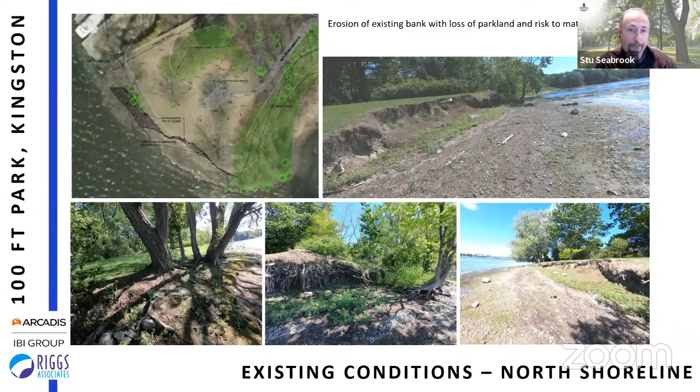So this slide shows photos of the southern portion. Oh, there we go. It shows photos of the southern portion of the shoreline south of the storm drain outfall. This shoreline would also be described as a low bluff, but it has been formally protected against erosion by a stacked rock wall. The nearshore area, again, is gently sloping with shallow depths. The nearshore material is similar to what we've observed in the last slide, sediment and cobbles. The cobbles here are maybe a little bit larger, likely due to movement of sediment due to the southwest wave attack predominantly.

The stacked block shoreline has been relatively successful in protecting the shoreline, and in general is in relatively good condition. There has been a loss of some soil from areas immediately behind the rock wall. This is expected to be due to wave overtopping and hydraulic action of waves around the upper rocks. Recent years of high water are expected to have been responsible for acceleration of the problem in this area as well. There are a few instances of the stacked rock wall leaning a little bit towards the shoreline as some of the backfill has been eroded.

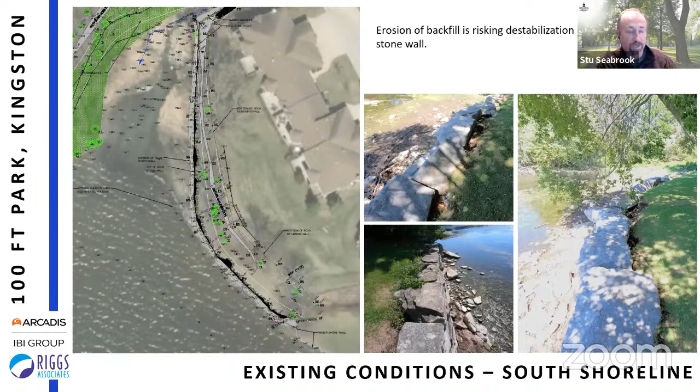This loss of soil will ultimately remove sufficient backfill to destabilize portions of the wall, and currently presents a hazard to the public due to the uneven ground and some occasional relatively deep holes that are immediately behind those armor stones. And this observed erosion again would be expected to continue during high water conditions if it's not addressed. Next slide, please.

I'm going to turn it over to Tim McCormick from IBI to discuss some of the landscape function. Thanks, Stu. I have the pleasure of walking through some of the other elements not related to the shoreline, but opportunities in the park to provide some improvements and correct some challenges that are going on, specifically related to the bridges and stone steps. We've identified the lower bridge as being the bridge closer to the shoreline as you're walking down the path. This bridge at present has worn deck on top of it, so we're starting to see decay and breakdown of some of the deck materials, which creates an unsafe situation and can cause slipping or breaking.

We're looking at what's happening with that one there. There's piers in the channel, which can create a long-term problem. We're starting to see decay and breakdown of some of those piers, which could long-term create a potential for failing of the bridge, which is why we're reviewing this one and opportunities to maybe improve upon it. The railings themselves are not currently to code. When they were installed originally, they would have been. However, as time has gone on, they've now fallen behind on the code, and this is an opportunity to review the actual safety elements of the bridge as well as the railings on the bridge.

We are seeing a failing substructure, and that is even more poignant by the fact there was a recent repair that had to be made last year to correct some challenges with the bridge and some failing elements underneath of the substructure, which impacted some of the decking and connections that went on with it. So this is why this bridge is part of this project, looking at opportunities to improve upon it and create a nicer bridge or better suited bridge for this space, as well as create one that is safe and working for the current standards. Next slide, please.

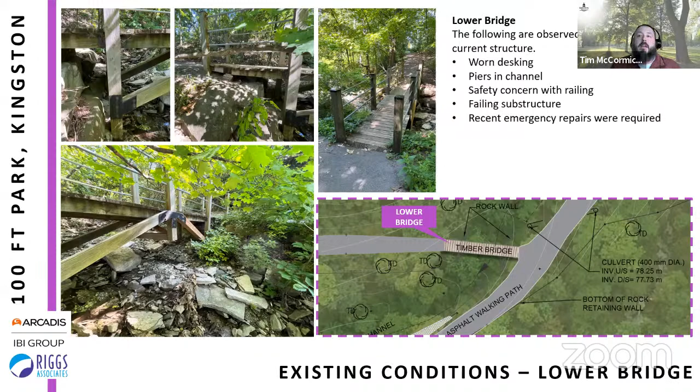The upper bridge connects to the Limeridge Trail or Limeridge Drive stone staircase. So it's right at the stone staircase and provides a connection there. Just like the lower bridge, this bridge is showing worn decking. It has piers in the channel. And this one even more so has more concerns with the railings. As you can see here, they are chain, offer not a whole lot of stability for going over the bridge and potential safety concerns. And then there is a failing substructure with this as well. And that's just due to the age and nature of the wood that was used to construct these bridges originally. Next slide, please.

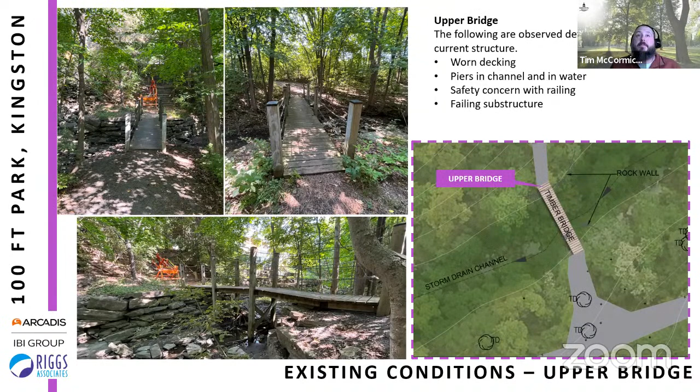The stone steps are currently showing some deficiencies and some erosion. Elements we saw in observing, sort of reasons for why we're considering replacing these, are uneven steps, which is natural. With natural stones, that's pretty common. So these situations are stones where each tread is a different height, so it can make walking up and down them a little more challenging.

There's safety concerns with the railings and failing in some of the railings in some cases. And there's been a lot of recent repairs and need for repairs along this area. So part of our review is looking at opportunities to create a safer condition and creating something that is maybe a little easier to maintain in the long term for the city.

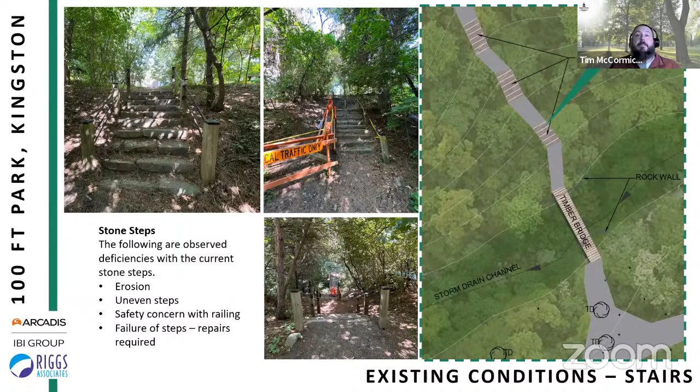Next slide, please. I'll turn the presentation over to Rob. Okay.

We've identified several natural features that will need to be considered during the construction phase. Obviously, fish habitat offshore. The quality of the fish habitat is a bit degraded here due to the periodic drawdowns that are required by the Rideau Canal. And there's a number of invasive species that use this particular area, which also degrade the habitat, but it's still fish habitat.

The offshore areas contain wildlife habitat features as well. Certain special concern species, which qualify under the wildlife habitat heading. It's also an important stopover site for migratory waterfowl. Shoreline features: the woodlands provide a buffering function that obviously will need to be maintained. And there are turtles that nest on the shoreline areas.

The woodland features in the woodland may contain special concern species. We can't confirm that at this point, but there are steps that will need to be taken to mitigate potential impacts in that regard. There's also, this is not directly related to the project, but there are concerns with sedimentation caused by the nature of the watercourse.

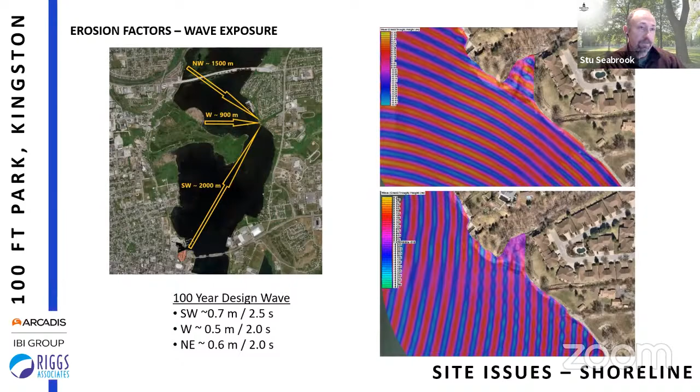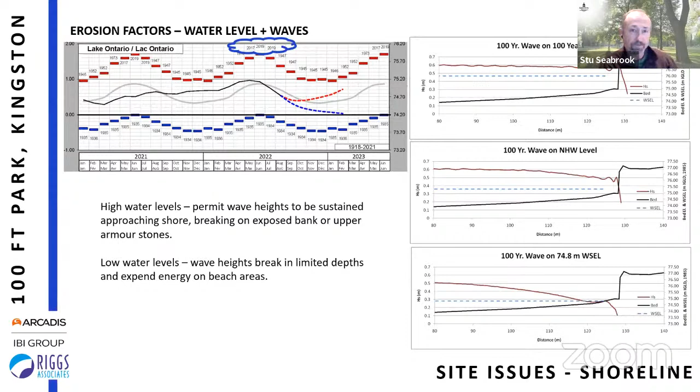In terms of consideration of structures, there's typically a wide range of considerations for shoreline protection, ranging from fully vegetative options to structural walls along the shoreline in cases where we've got significant wave heights, very large wave heights, and lots of hydraulic activity at the shoreline. This site, the north shoreline, sits somewhere at the lower end of this scale. We do have, as I said, relatively small wave heights to deal with and relatively low periods. The wave heights are too significant, in my opinion, to be protected with just a vegetation option. So we're looking at an option that includes some form of beach anchoring and some vegetative options as well.

The southern shoreline is already protected, of course, with that stacked rock wall. We don't propose to make any significant changes in that area. What we would look to do is make some modifications in that area to help protect against overtopping.

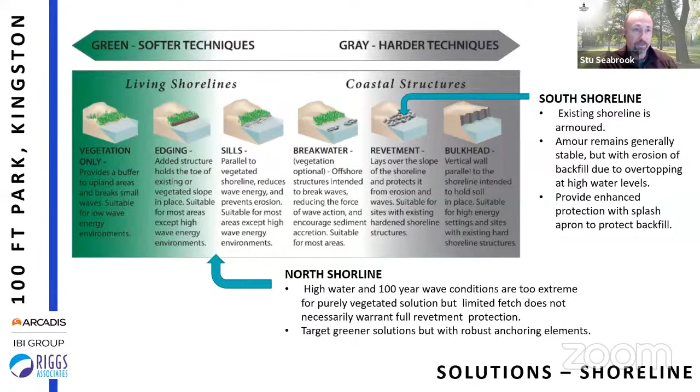This would represent a typical concept consideration that we're looking at further right now for the northern portion of the shoreline. It includes a rock sill to anchor the beach. That rock sill would be integrated into the local beach, so a lot of it would be buried so that we're not looking at a significant pile of rock along the shoreline, but it would be in there in place in order to protect against erosion of the upper slope during periods where we might experience some erosion along that section. The rock sills would be largely buried.

Steep slopes will be flattened and they would be vegetated with species to provide some stabilization of the shoreline through their root structures and to provide some habitat enhancement. We would also look at potential to provide a point of public access within this section of shoreline, as it is an area that is relatively frequently accessed by the public along the park area. Next slide, please.

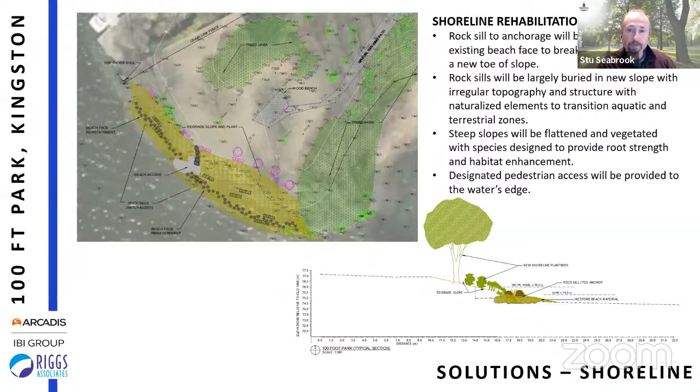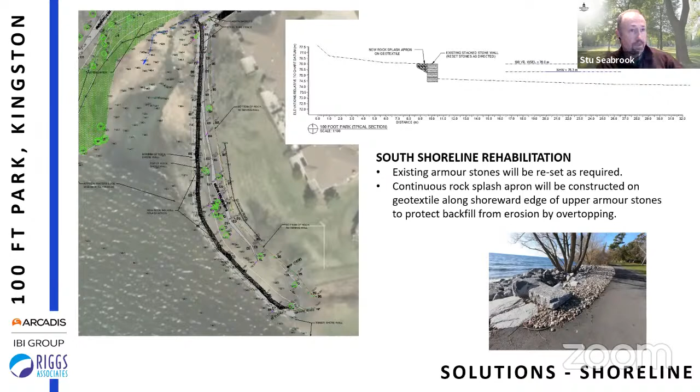This is in Kingston along the Mullet Path. Something like this would provide material that's more resistant to erosion in the event that high water occurs and we do get some overtopping. Next slide, please. I'll turn it back to Tim now for some discussion of some of the landscape solutions.

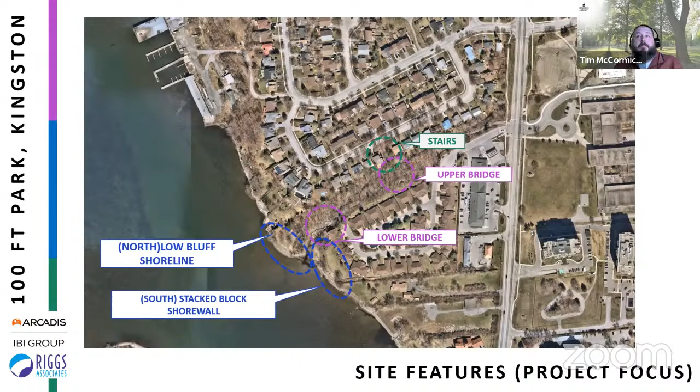Thanks, Stu. For this section here, again, I'm going to focus in on the bridges and put this slide back up as a bit of a reminder, just so we know when we're talking about the lower bridge and upper bridge and the stone stairs, where they're located, and just sort of tie back to where they are in the park. Next slide, please.

So in our preliminary review, we've started to look at opportunities for bridge improvements at both the upper and lower locations. For the lower bridge, the critical part is really improving the decking and railings. That's one of the critical parts here, improving user safety throughout the whole use of the bridge and tie-ins on those edges, as well as on the bridge itself. This may include some abutment improvements, abutments being the elements that anchor the bridge on either end, trying to find opportunities to minimize erosion and really hold the bridge in place if there are flooding situations that may occur in the channel.

For the lower bridge, we're looking at a potential realignment. This is an opportunity to maybe shorten the crossing as well as orient it just a little bit more square on the channel. We recognize why the bridge is put where it was, as it ties in nicely to the trails and works as sort of the most direct route, but we're looking at opportunities to see what is the right answer as we go through it. So an opportunity to maybe have a realignment.

The other part we're looking at is really less footings in the channel. Currently, there are footings or piers that come down and touch into the water. We're looking at how we might be able to span this without having to have those footings in the water area, which will create a longer lasting bridge and minimize maintenance requirements overall. So that's one of the bigger elements we want to try to do through the treatment in this area.

We'll also be looking at opportunities to improve the trail, tying back into the shoreline work on the other side of the bridge, and trying to make sure that we're cleaning up as we go through this area and tidying up any loose ends in the trail or the park where we can.

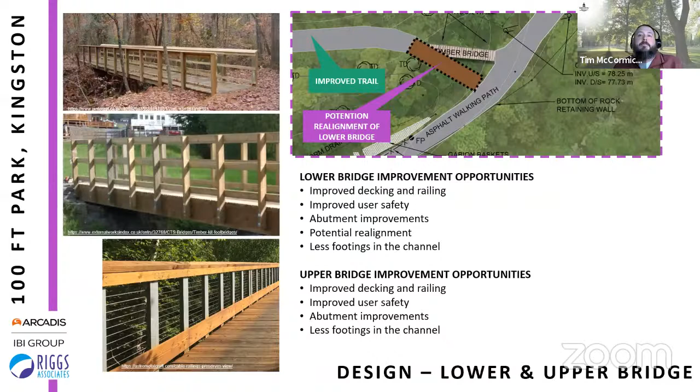So the stairs themselves, we're reviewing the orientation of the stairs. We recognize that the stone stairs have been there for a while, and we want to minimize the impact to the adjacent areas around, so minimizing impacts to any existing trees or the slopes around it. So the stairs themselves will likely follow a fairly similar location. We're going to be looking at opportunities to improve safety through the use of concrete or materials that are there, and having steel railings.

So again, elements that are going to have long-term strength and minimize the maintenance requirement within this area. Concrete's great in the fact that we can uniformly create the treads and make sure that it's actually standardized, so it makes it easier and safer for people to use. And as I said, the biggest thing here is minimizing the long-term maintenance and replacement costs. The hope is we can design and implement something that's going to be there for a long time.

We do recognize that the existing rock stairs, there's natural stone there, and we're going to be looking for any opportunity to reuse those in retaining walls or accents along this area where we need to try to minimize the need to take that material off site.